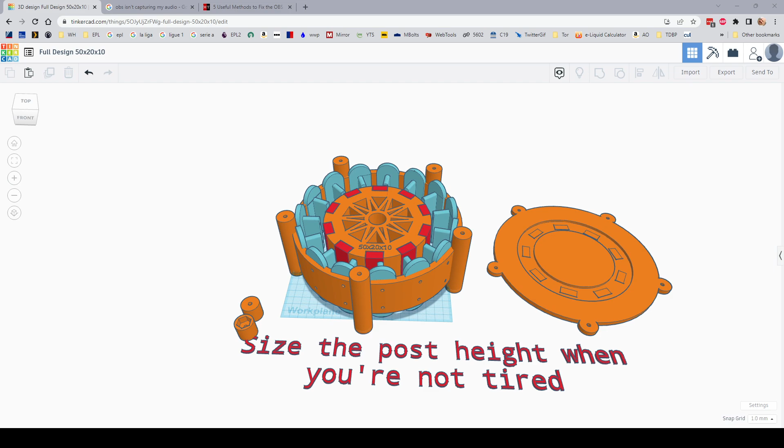Hey folks, I just want to show you that you can make some pretty intense designs, some pretty complicated things here with TinkerCAD, really without a whole lot of effort and with some basic shapes.

So this is a little generator that I'm working on, and these little blue pieces are going to be coil holders. These little red pieces represent the magnets that will be used in the design. And yeah, so all this was made with the most basic of shapes, and this is not even really a complex design if you look at some other ones out there.

So, what was used in this? I used cylinders, both holes and solids. I used rectangles, holes and solids. I used a few roof pieces or triangles as holes. I used some of these half circles, and really, I think that's about it.

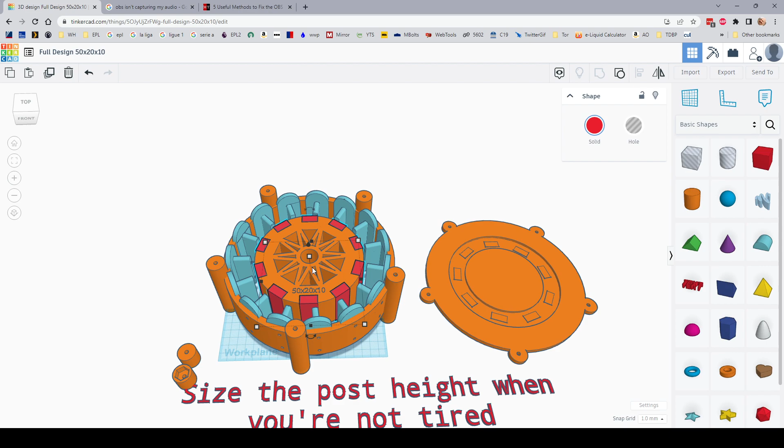So let's break down just the rotor piece, just to show you what's going on there. So to start off with, the red pieces, the magnets, are just rectangles, and they're grouped together, and they're not connected to anything, and well, they're not even really going to be printed. But I wanted them there as a representation that magnets belong here.

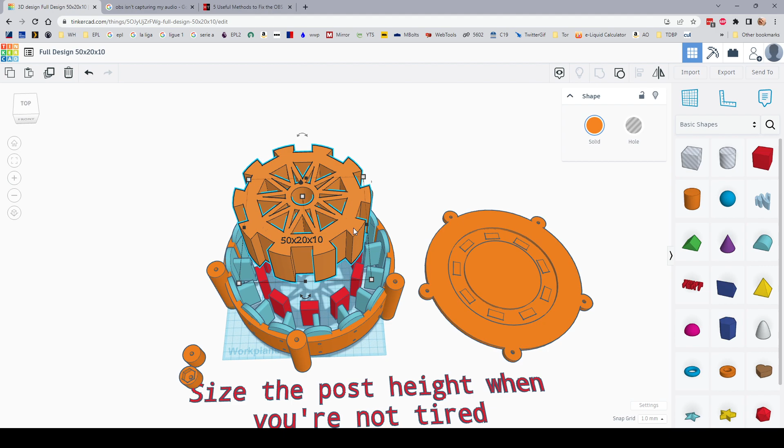But the rotor itself, I'm just going to select that one piece and pull it up. Well, that still looks maybe a little bit complex, but it's not. So what we're going to do is ungroup that and see what it's made up of. Well, it still looks a little complex, don't it? But again, it's not. Let's look from the top down.

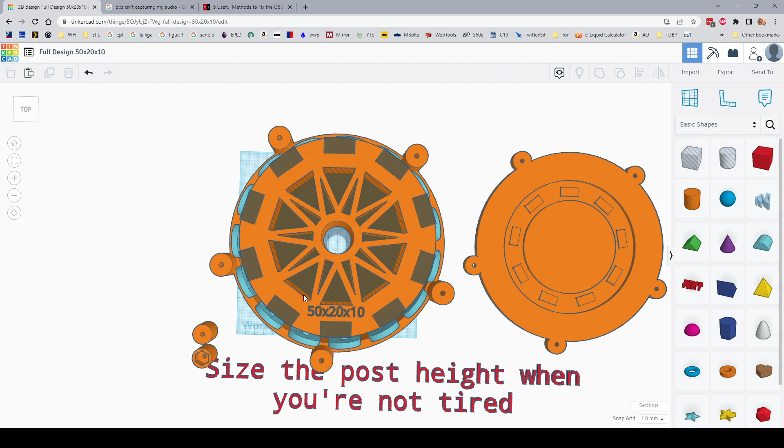When you break it apart, the hole pieces that are going to be negative void space show up kind of gray looking like this. So we can see around the outside we used those same rectangles that we used for magnets. We just turn those same exact things into holes to make that void space for us. So that's pretty cool. So that's all those are, just rectangles.

In the center, you have all these different shapes of triangles. It's actually just two different sizes of triangles. You got this size here, and you got this size here. And there's no real function to these other than to save on material when I go to print this, and it kind of looks cool. But that's all it is. They're just rectangles and triangles.

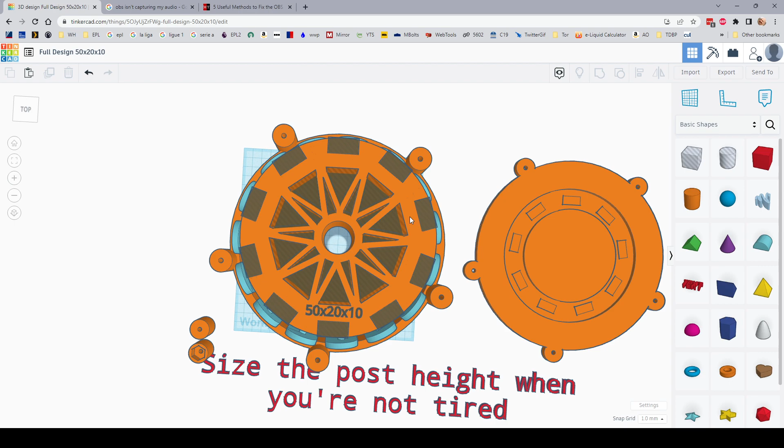Okay, let's keep going because that's not really all there is to it. This is just some text that I made, and you push that slightly below the surface so that it makes like an imprint. So if you want to label your piece with an ID number or product number or somebody's name or whatever, you just make text, you turn it into a hole, and you sink it into your solid surface. So that's all that is.

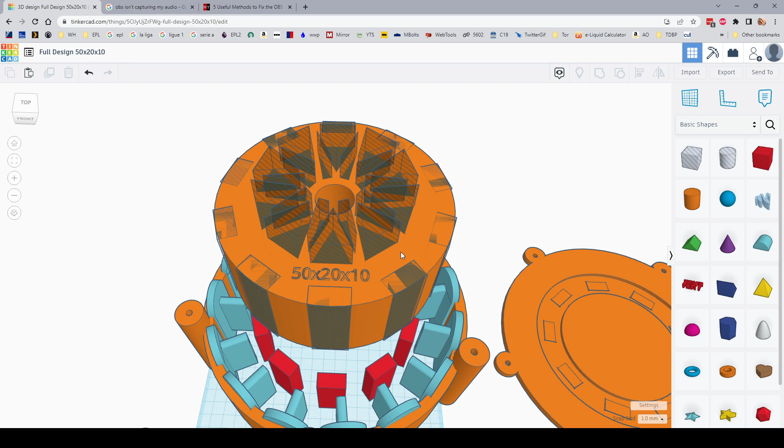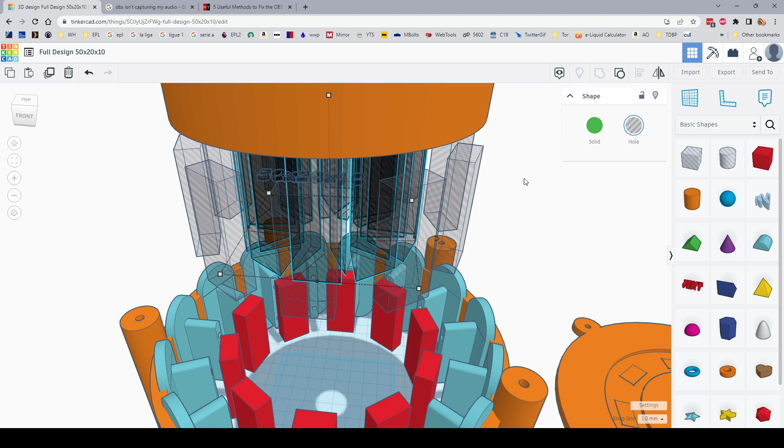All right, let's pull up one more time. I'm going to pull just the wheel up. It looks like a big piece of cheese, don't it? And each time I'm leaving behind what I had. Here's the magnets, here's the rectangles. If you kind of look up its little skirt there, you can see the triangles. And coming down, now you've got the wheel. Well, it's not just a wheel though, it's got a hole in it, right?

So let's ungroup that and see what that is. Well, I'll be. It's just one big cylinder and one tall skinny cylinder that is a hole.

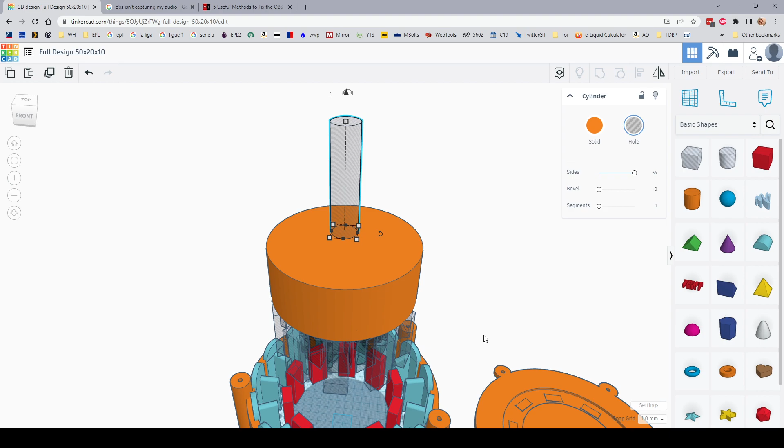So by picking your shapes carefully, by sizing them the way you need them to be sized, turning it into a void space or into a solid, you can put those things together and make something really cool. Now, let me undo all this.

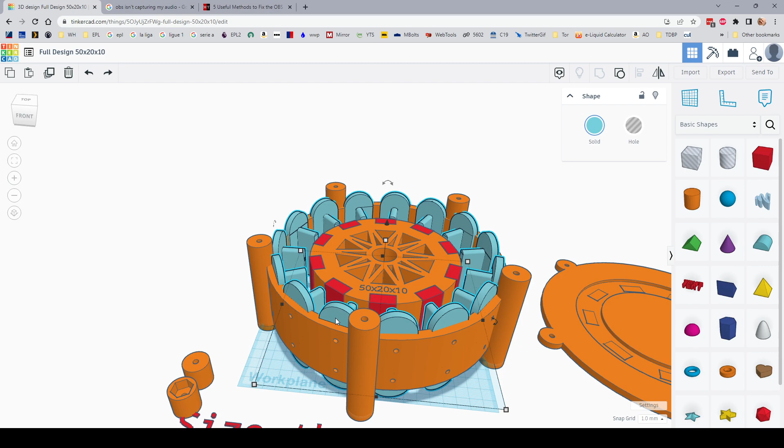So these guys are just the same. Now I'm not going to pull those out. I tried to pull one out earlier, and I just grouped them way funky, so I'm not going to do that. But I will show you that this is the frame that the copper coil will be wound onto.

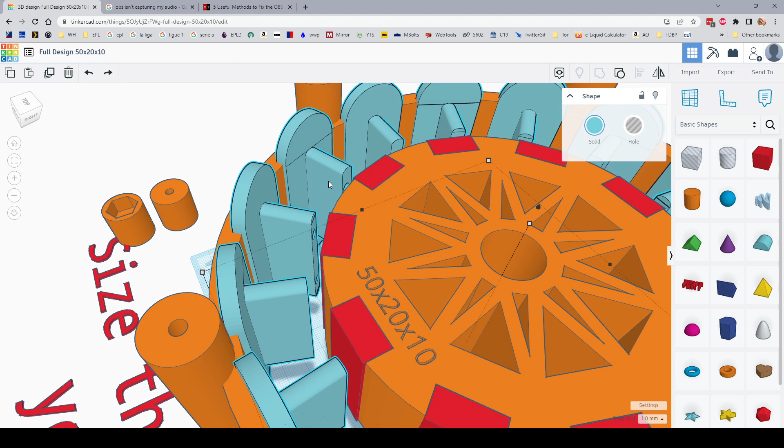So all you have there, and I'll see if I can zoom in, look at this little back plane, right? You have a half a circle put together with a rectangle, and on the bottom you have the same half circle as you have on the top, and it's grouped as one piece. Now extending out from this, you have exactly the same thing. You have a half circle on the top, you got a rectangle in the middle, and you got a half circle on the bottom, so it makes nice little curved edges there for you.

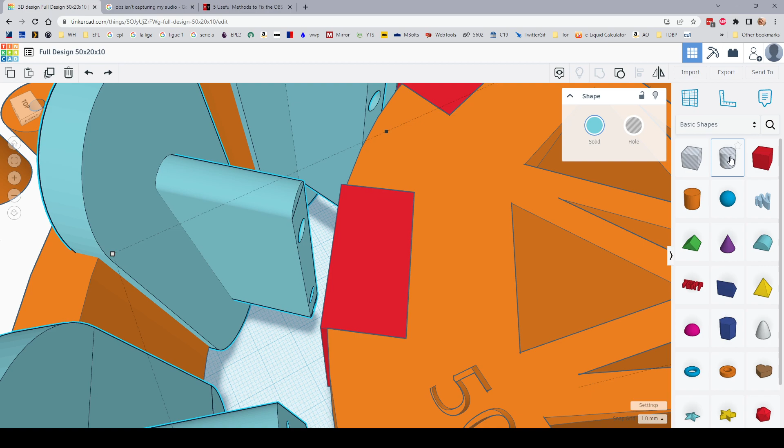Now if you blow this thing to bits, you'll see that, like right here, you got two holes. You got a hole that goes all the way through to the back, and all that is a cylinder that is turned into a hole. So if you want to thread something in there or whatever, you can do that. This big ring on the outside, let's see if we can pull that out. I don't know what we got going on there, but let's see.

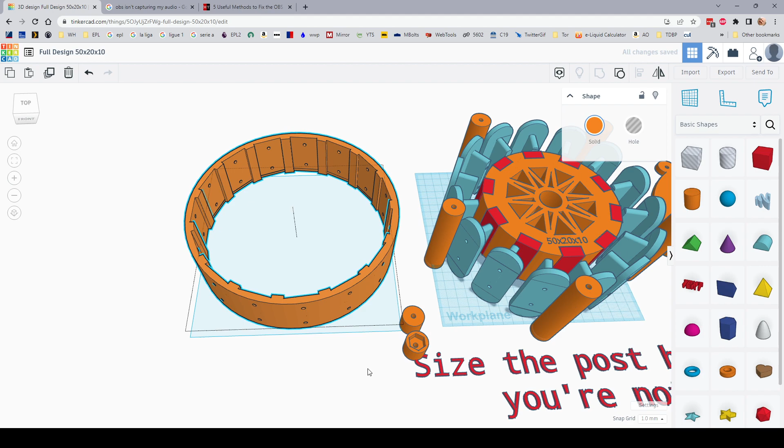Okay, so essentially we got the same things. I'm going to blow it up, ungroup it. All right, so this is what all these little threaded holes are made from. These interior cylinders at different angles, and it's easy to reposition those things. All you do is, let's see, we got what, 15 of those things. Yeah, it looks like we got 15 on the top and 15 on the bottom.

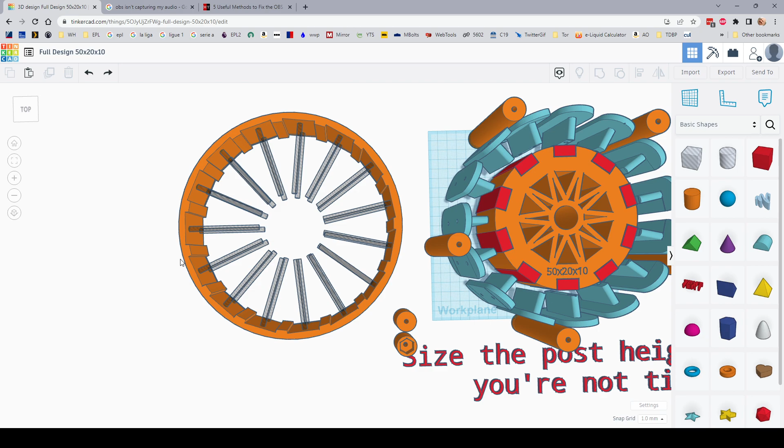All you do is you make one inside your ring, and if there's 15, you'll take 360 degrees divided by 15. You come up with a number. That's the angle that you rotate, and it'll rotate all the way around. Anyway, more on that later. So you got this ring on the outside, and then you have these guys. I'm going to get rid of those for now.

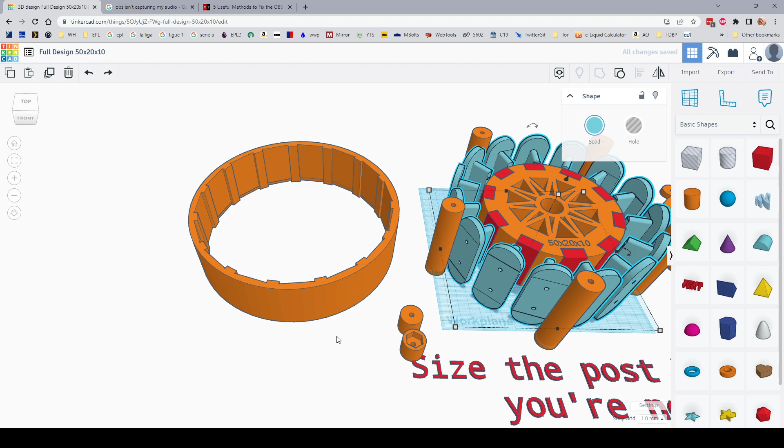Let's blow that apart and see what we got. Look at that. That looks familiar, doesn't it? It's the same thing as these. Now, I want to fit these guys into these slots, but I had to make those slots. So I just turned this into a hole, and fit it in exactly where I wanted it, and it makes this little cutout that you see. See those cutouts.

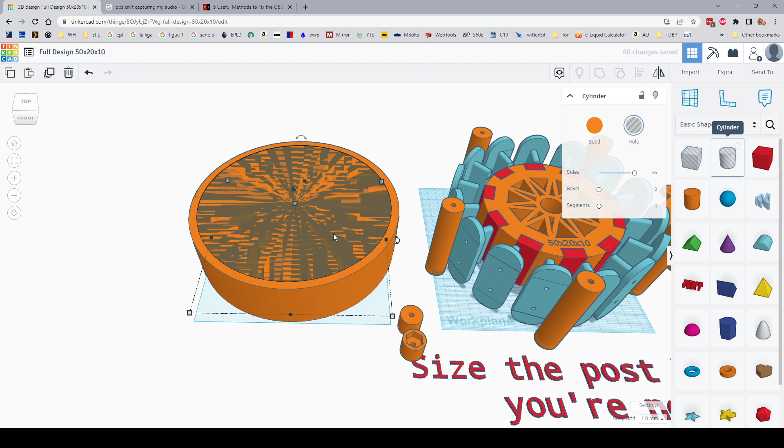Okay, delete those. Now we're left with just a plain old ring, and it's the same exact thing as this on top, but our negative space, our cylinder that's a hole, is just much larger. See, so those are all extremely basic shapes.

We got holes, or cylinders, we got rectangles, we got half circles, we got triangles, and I think that is every single thing that I use in here. Oh, and text. So now you see it's really not that difficult, so don't let the task look worse than it is. Hope you enjoyed it.